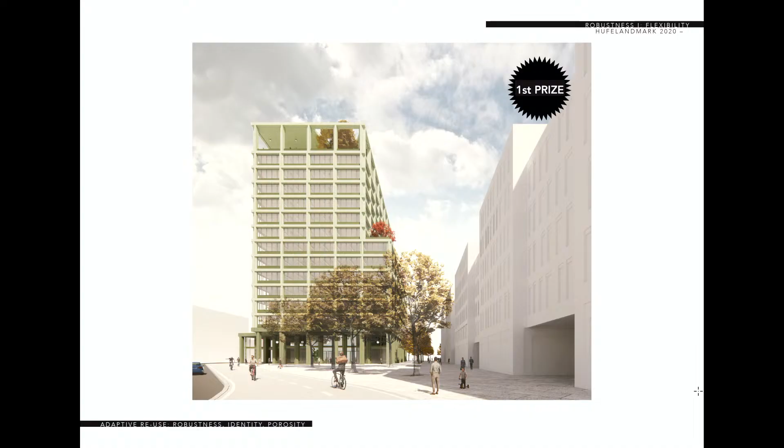One of our biggest projects in that context is a high-rise building in Munich with Morris & Company from London. We won first prize for this, and it's located in the north of Munich.

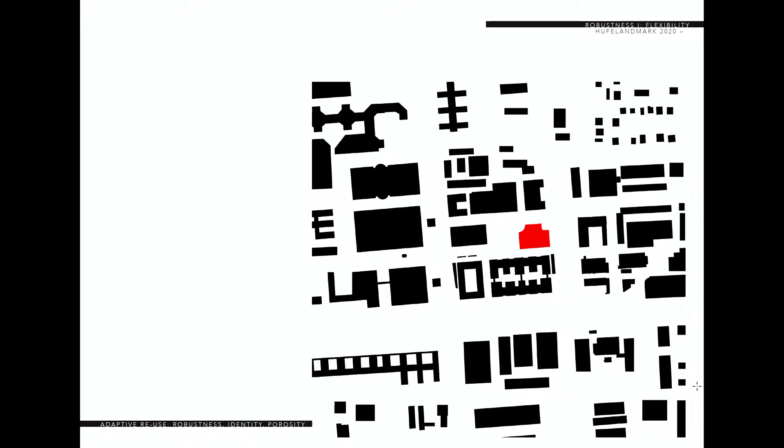Here you see a little bit of the BMW campus, the FIZ Future campus, which dates back a while, but was master planned by Henn Architects a while ago. This area - these four buildings - will be completely newly built in the next years, and they should mainly form office spaces, but also auxiliary uses for companies that deliver parts to BMW.

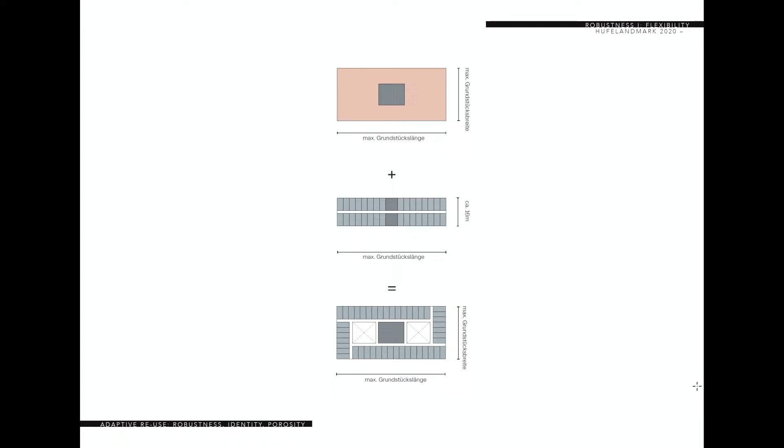Our task was to design a 60-meter high-rise that contains office spaces in the top parts and a hotel in the bottom. Those of you who have designed hotels or office spaces before know that those two typologies don't go together so well in that stacking order, because an office building usually has a core and you try to maximize the space depending on your site and distance rules. A hotel, on the other hand, usually has a corridor typology with standardized rooms - all needing a piece of facade, but not too deep, or it's a waste of space. So as a rule of thumb, you end up with a building that's ideally about 16 meters deep.

We solved this paradox by inserting two inner atriums, which you see below, next to the core. That gave us the possibility to make very regular hotel spaces around them, and also gave the building a spatial quality that a simple corridor typology wouldn't have. Here you see the resulting floor plan - above is a typical office floor, and as usual, we had to show that it can work as both open-space offices and cellular offices.

We also included loggias on each floor so that you have really high quality exterior spaces. Below you see the typical hotel floor with the interior atria, and here we have loggias that are 2 to 3 stories high, and they bring light into the inner atria inside the building.

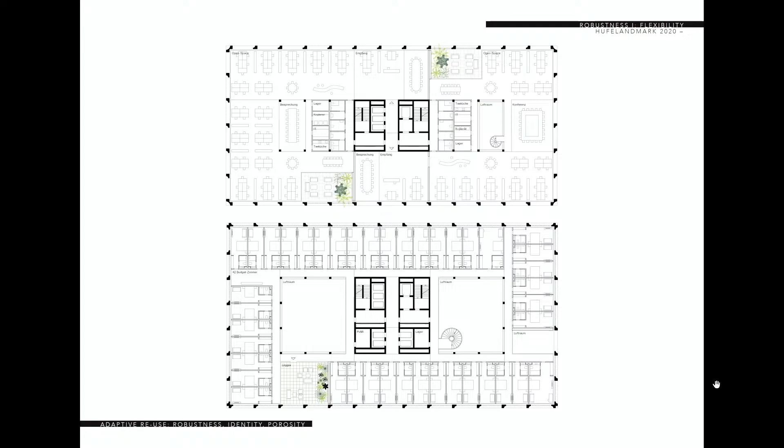What you also see here is a bit special. We have the core as the load-bearing structure, and then we have an exoskeleton around it. Away from this area, we don't have any columns, as you see. So spatially, the building is already as flexible as it can be in our mind.

Generally we try to make our buildings flexible, but here the main reason was that we designed it during 2020, the corona pandemic, and it was already clear that maybe hotels won't be so in demand in the future, maybe offices also not. We wanted the building to be designed in a way that we can close the atria floors later, for instance, and make it into office spaces or even residential uses.

How will that be possible? What we did, and that was a bit far-fetched at that moment, but now it would be possible also in terms of the German regulations, Zulassung and these things, is we used a structural system that's actually designed for making big industrial long-spanning spaces, big workshops.

That is, first of all, a very additive system, so you have a high degree of prefabrication, and when you're on site, you can just assemble everything. It's quite quick. The other good thing is that you have a post and beam structure: a precast beam, then a concrete precast post or column, and then steel beams that, depending on the loads, are flush with the underside of the ceilings.

And then you have pre-tension concrete slabs, which are hollow slabs, so that reduces the weight, obviously. That way you can have very high spans. In our case, it was 9.55 meters, which you cannot do with another system.

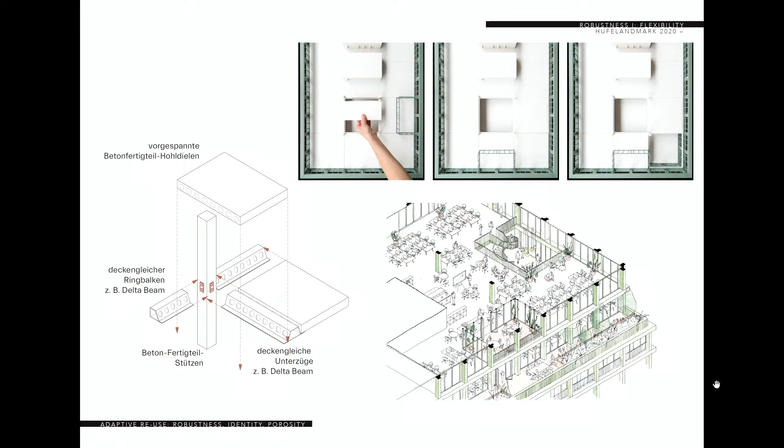I mainly already talked about what is shown here. Each floor can be divided into different compartments. The loggias can move - you see on the model shots that the loggia is on the right-hand side once, and then it's below. That's a bit of an effort, and you do it maybe every 20 years, but because of the exoskeleton, you could have the thermal facade changed around without changing or without having to do anything to the structure.

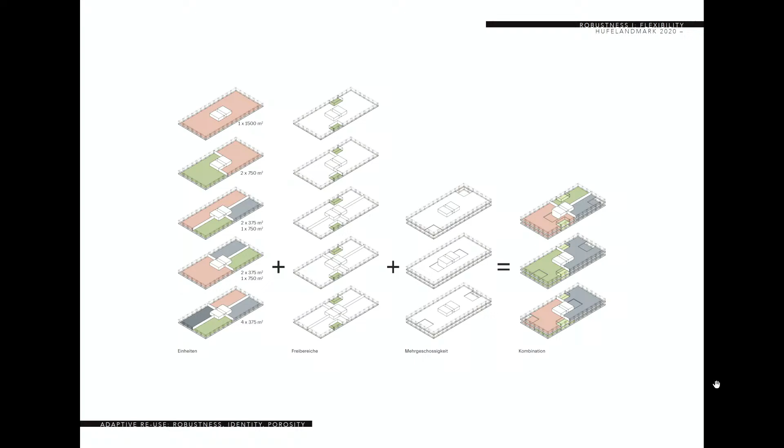That makes it more interesting, and then the soft spots, and overall you have a very lively building. Another thing that's not just about structure and flexibility is, of course, it's a really big building - 60 meters high, 60 meters deep - and we wanted to have some sort of human scale to it also, and also read these layers that the building has due to the distances you have to keep to the neighbors.

So the idea was that the precast exterior columns have these scoops, and the scoops have different radiuses on the different tiers of the building. That way, what you see on the right-hand side, you have different shadows that the sun creates, and that way the building gets this playfulness in the facade and also a bit more of a human scale to it.

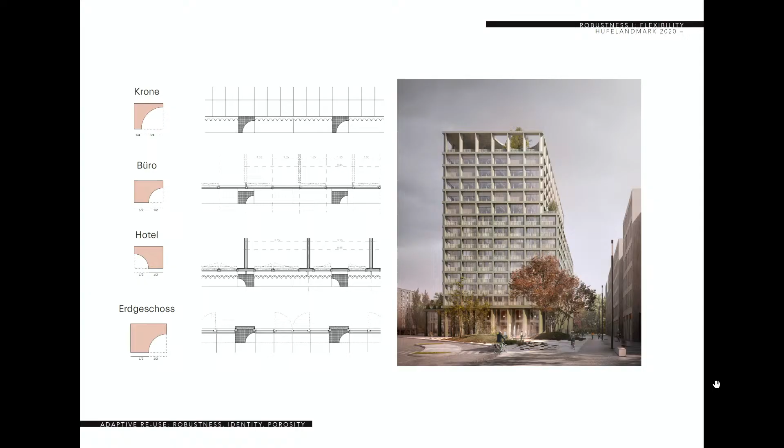The topic of flexibility, I was already interested in that during my studies, and the first project one of my partners and I did in that respect was in 2014.

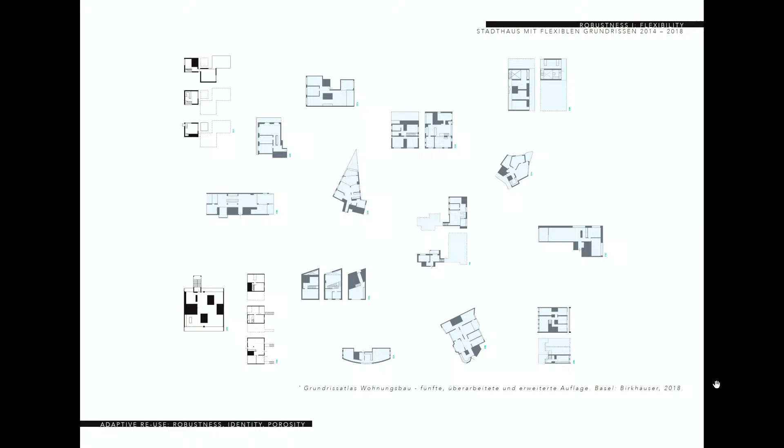Our take was that we have to do something different, that can account for people living together as a community, maybe four people in a shared flat, or older people living with younger families, or families who stay while their children move out. What do they do then?

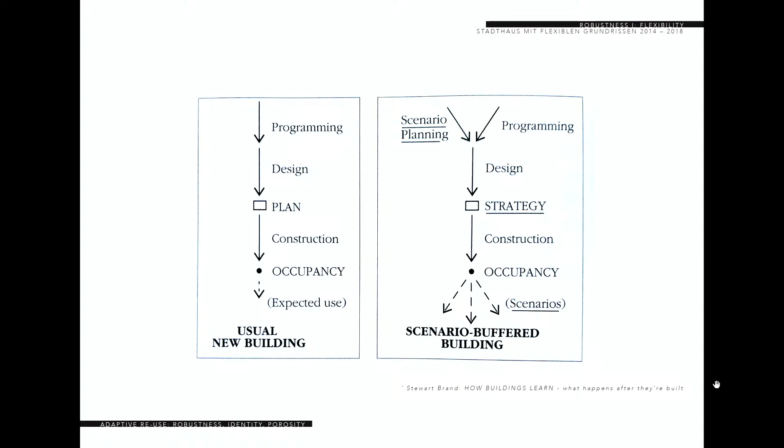I'd like to quote Stewart Brand, who says, if we're wrong in the beginning of the building, how can we look into what the building does later? He called that the scenario buffered building, which means you design scenarios that the building should be able to fulfill and specifically answer. So you don't try to design a building that can do everything, but think about realistic scenarios, and design a certain number of those into the floor plans.

In our case, we did something not many people did back then—now they do, which is a good thing. We said we want to make it a skeleton building, even though it's residential, and take ideas from office building typologies, for instance this inner zone which contains the wet spaces.

We thought about how the different apartments could be arranged so that apartments can grow and also shrink, which is a bit complicated when they're owned by different people. What I'm showing here is that within one big apartment you can have it as a kind of loft typology on the right-hand side—a completely open floor plan with just one box for the toilet—or you can have a maximum of 4 private rooms with a more public area like living, kitchen, and dining going through from north to south. On the left, you see some of the intermediate steps that could be realized with this plan.

How can you do that? Now it also becomes a little technical. I already talked about the structure—when you have the load-bearing structure, a skeleton, you can remove walls or even ceilings to create different spaces. But you also have to think about the MEP installations, because if they're the last thought in the design, they're usually in places where you don't need them when you want to change the use of a building.

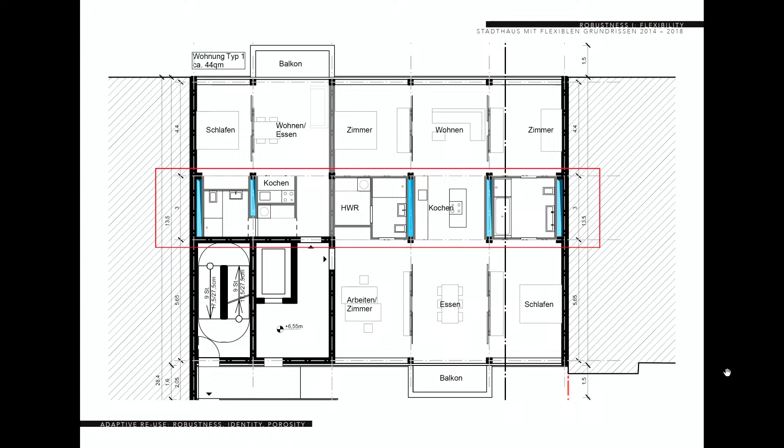In our case, we convinced the MEP engineers that we could make really slender shafts between the two columns, so that we'd only have columns left over when we clean the floor plate. This also gives the possibility to either have the kitchen here or on that side, or have nothing here—so you're very flexible about positioning these wet spaces that need the installations.

Another thing I find very important about the scenario planning: we designed these floor plans to have private spaces of maybe 12 to 15 square meters. So it's also about what sizes and arrangements you design into your scenarios.

You cannot put a wall later just in any place, because, as shown in the detail here, you have floor heating, sound insulation, and other requirements. In our case, we have this grid structure, and on it we designed a wooden beam that's always there, which interrupts the floor heating but also provides some soundproofing—and that's the place where you can realize a wall or not.

And what you see here in the rendering is that the structure also defines the space, so it's always showing in the reading of the space—the building explains itself, which I find important for communicating architecture with those who use it.

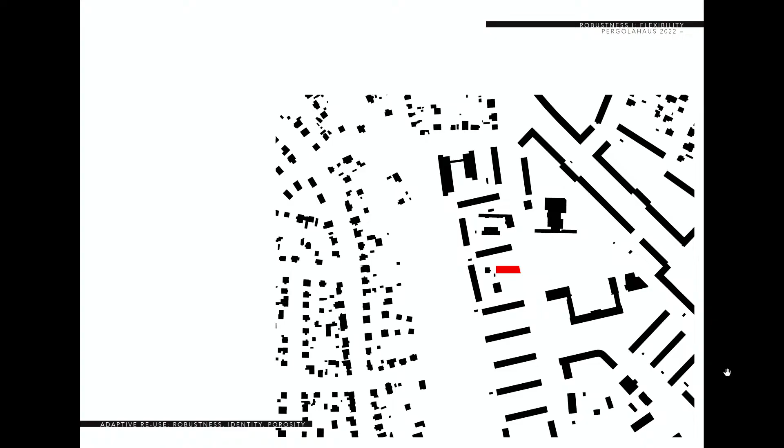We keep going with this topic. One of our recent projects is an addition in southwest Berlin, where it's not so dense, so it's also a densification of this area. The special quality here is a little river, but also these linear, green spaces between the buildings that people use for relaxation, sports, and circulation.

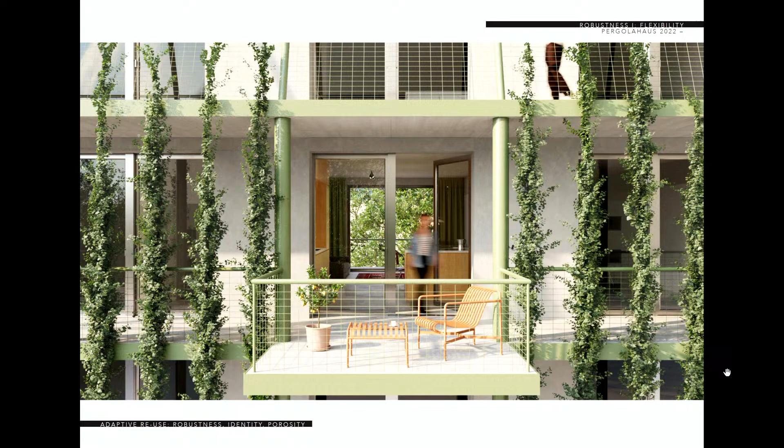We wanted to fit into that green atmosphere with big old trees, and designed an apartment building where the circulation into the apartments is a terrace typology. The way we added these little balconies is that the terraces are meant for circulation, and people meet there too, which enhances the communal feeling of the people living there. Then they also get private spaces to spend time.

This is now a climate buffer—normally you'd put this to the north, but we put it to the south, and the green plants make a climate buffer. In summer they're green, giving shadow and coolness, and in winter they're not green, so you have enough light inside the apartments.

Since this neighborhood is kind of monofunctional, we thought maybe just living is not enough—maybe a dentist or a little office should be possible there later. So we designed the whole building on a 1.35 meter grid, which you see in the middle.

Above you see the apartment mix the client asked us for, with bigger and smaller apartments. All apartments have this room that goes from one side to the other, giving a see-through effect where you see the greenery on one side and again on the other.

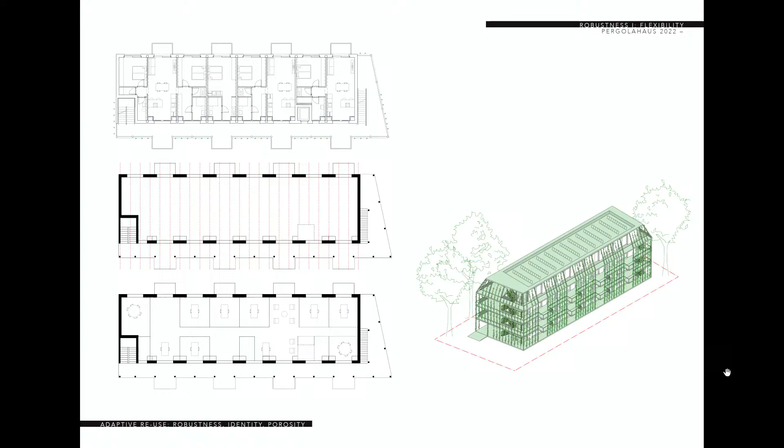The floor plans below are designed so you can realize an office space, for instance, here, and as you see on the lower right, you can have no columns inside the floor at all. That was possible because it's a relatively shallow building, not too deep, so we designed quite high beams that span from one facade to the other.

We have to think about the MEP always. In our case, we put it onto the facade, and it's over-installed—you have two shafts where sometimes you only need one, so later you can subdivide as you see fit and always have the water, electricity, and everything you need. These beams, when you have the open space, give a rhythm and understandability to the space for the people who use it.

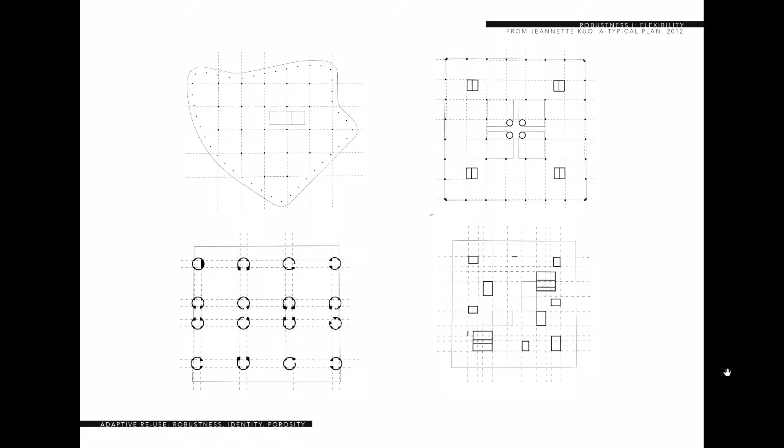I'm quickly jumping into something I like to show when teaching. Jeannette Kuo did a studio in 2012 about the atypical plan. She was looking at deep plans, maybe as a tool you can use when designing new buildings but also analyzing existing ones—making really reduced plans of existing buildings that show the load-bearing structure, the grid lines, and the installations.

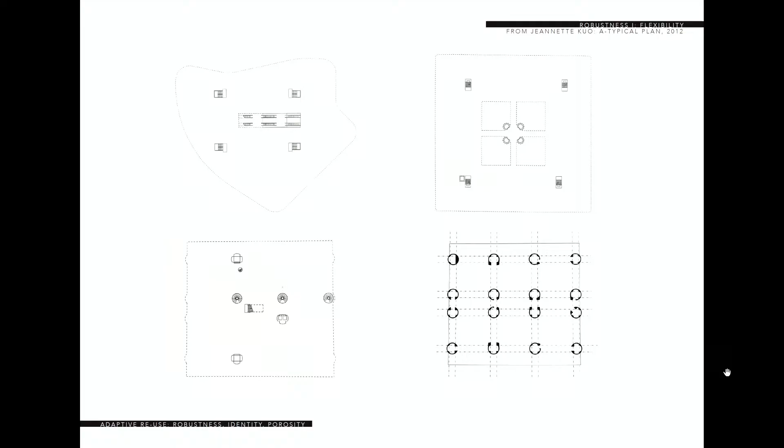In this case, you see the columns and the grid lines that result, and then where the installations are in the buildings. Also interesting and important for this topic is the vertical circulation—where your stairwell and your elevators are, especially in big buildings.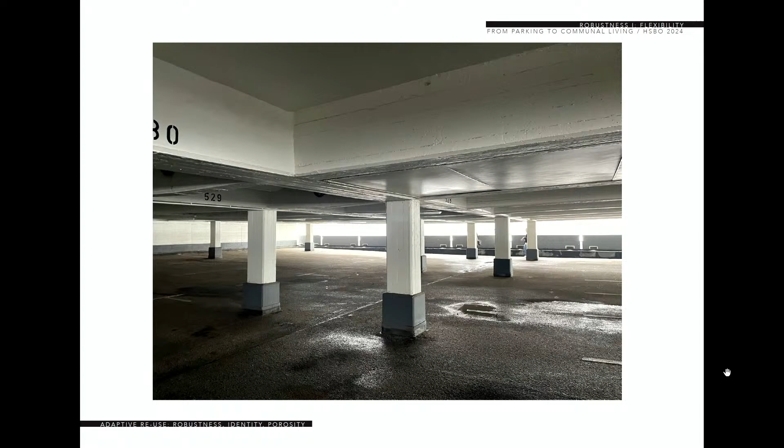That way of approaching buildings I also took into a design studio in Bochum two years ago. I asked my students to reuse an existing parking house, which is in Hanover, into a communal living typology.

I always think we should look at two things at the same time. One is the spatial quality of what's there. So the students build models and arrange little situations to look at—can we deal with low ceiling height, for instance, or what happens when we make little portions of that higher?

We also looked at the structure again, and the students built big 1:100, maybe 1:200 models of just the post and beam structure. The requirement was that the structure has to stay intact, so you need the cores, posts and beams, but you can take out the ceiling slabs.

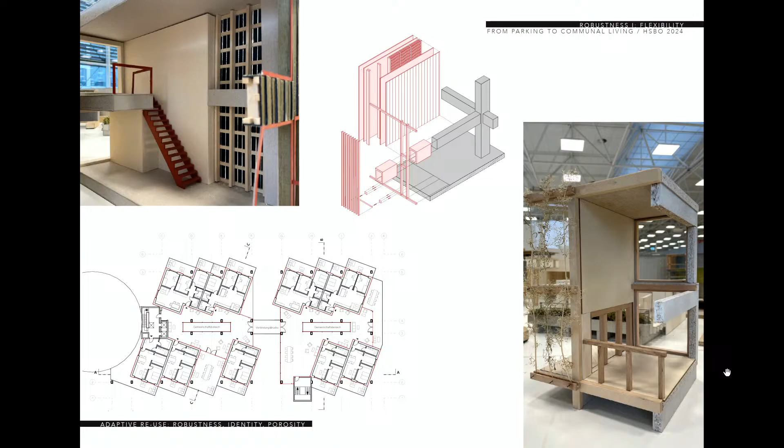And the result was really interesting. So you have this three-dimensional matrix of posts and beams, and students sometimes decided to go against the grid and do something diagonal, creating interesting spaces that are like balconies already half in. They all worked with double height spaces, since the existing building only had 2.60 meters floor-to-floor height, which for residential use, with floor build-up and so forth, isn't enough. So you sometimes have compressed spaces and sometimes open spaces, giving an overall interesting spatial quality.

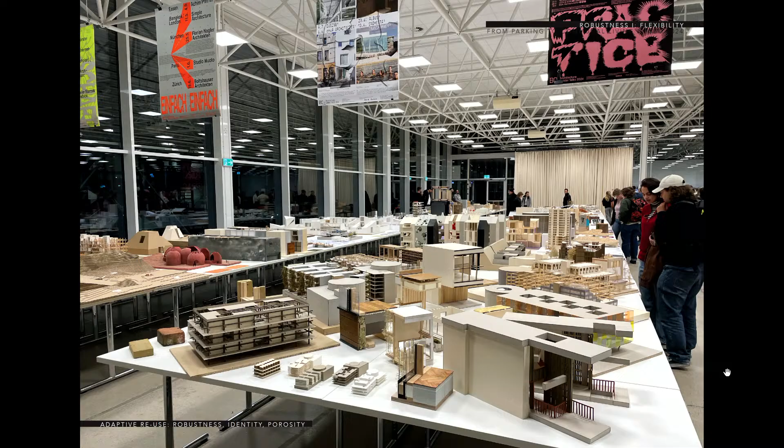I like this building, this picture, very much because it's also a nice space that it's set in. But what I actually want to point out—in the front you see all the models from this design studio, and here you see the urban scale models. Within that matrix that was the same for everybody, students created very different spatial answers about what the thermal or inner spaces of the new use would be.

Now I'm briefly talking about another approach, variability, defined as designing spatial structures whose dimensions allow them to be used differently. Of course that has typological boundaries. So within an apartment, you can use a certain space maybe for living and sleeping and working, or as a kitchen. It's difficult to fit a theater into an apartment, of course.

With that in mind, we designed an inclusive community in Petersaurach, a little town near Nuremberg in the south of Germany. What's important from the urban design is that the actual town is here with a little main street and some shops, and everything above the river is the typical suburban sprawl with single-family homes. Because they're very close to Nuremberg, a growing city, they have more and more of these suburban areas where people live and then work in Nuremberg.

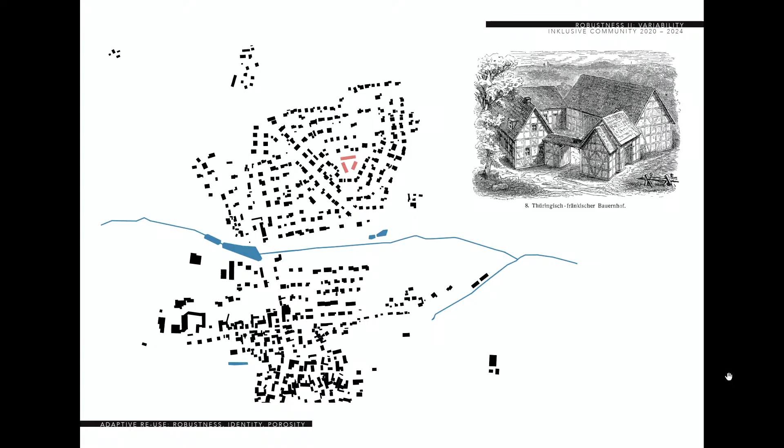Our clients were lucky to get this plot in the middle of one of these new areas, so we decided typologically to create a bit of a new middle for this sprawl-type area. We looked into some traditional typologies, like this Franconian rural typology.

The important thing—maybe I should say a bit about this community. It was an existing group of people who had decided they wanted to live together, ranging in age from 0 to 87, and they had some members who were severely disabled.

One group member had children, so she was also taking care of two people who were in wheelchairs. Then there were other people with disabilities, some older, which is why it's called an inclusive community—their aim was that they all care for each other, looking out for one another, maybe taking turns helping with the little children, the older people, or the people with disabilities.

For this reason, the heart of the whole design is this communal courtyard, which isn't closed off to the exterior but is the main place where they come together. To create this middle of the sprawl area, we also designed a Dorfplatz—usually the center of a little village. In Germany there's a tradition of planting a certain type of tree where people get together and talk, and we wanted to provide that too.

We also included a bit of public use, an ergotherapy praxis—does anybody know what that is in English? It's a type of therapy where you build something or play, being creative but also working with your hands, which is the therapy one of the community members provides to clients. Then we have two residential buildings on the lower part and a big communal building containing a community space, plus practical spaces for storage, cars, gardening tools, and things like that.

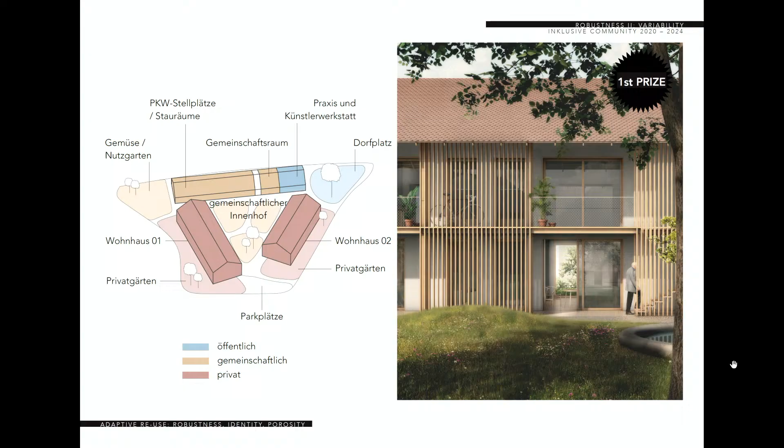Really important is the sequence of public, communal, but also private, because you cannot be in the community all the time, then the community probably has some fights soon. So we defined the sequence that you enter the whole thing from the public areas on these three corners, then you enter into the communal court, and from there into the private living buildings. Additionally, you have private gardens to the outside, so you can be outside without having to talk to anybody if you don't want to.

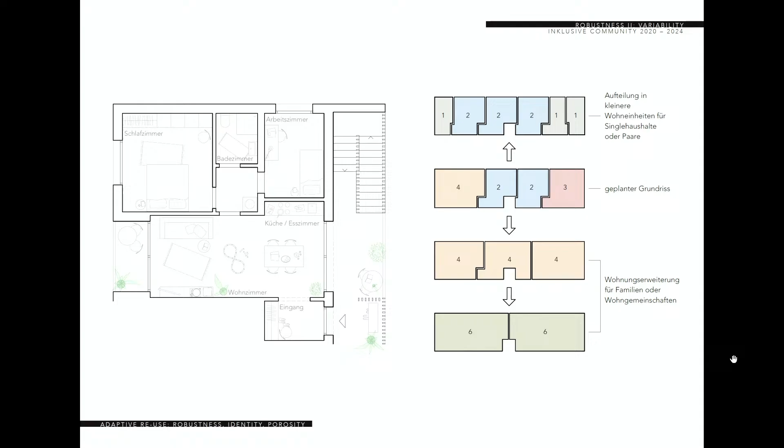And you can change the size of the units because each unit has this entrance area, and here you can make a link to the next entrance area. That way you can make a chain of spaces that belong together, or you can separate them later.

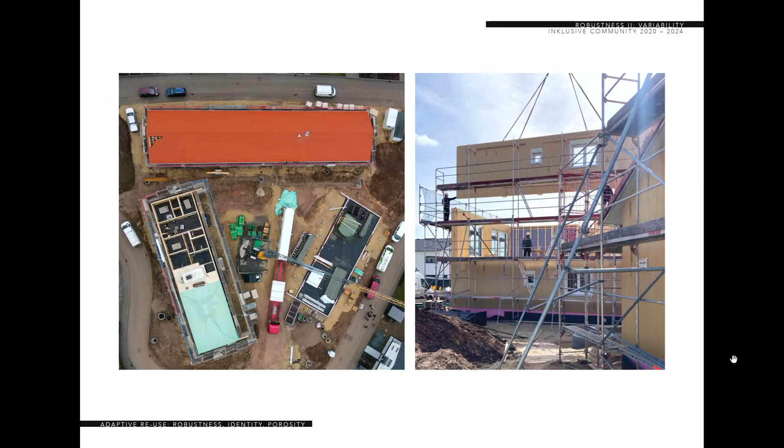Why did we do that here instead of the other approach that we did in other projects? That's because it's a building that's made of these wooden framework components that are prefabricated, so it's this kind of cellular structure, and these are not very flexible. You cannot cut just a hole in there in any place later, so that means that the walls that are built now will probably stay the walls for the whole living time of this project.

In the meantime, the community has moved in. The garden is not completely done, but what we're really happy about is that these terraces are really working really well. All the residents say that in the morning when they go to work and somebody's sitting there, they have a quick chat and maybe they meet later in the afternoon. So it really kind of keeps the community together.

It says first prize because first of all, it was a competition and we wanted to then do the project. Secondly, this community won the Bavarian Integration Prize recently for their building and living together. And very German, something we didn't think about, is that they put these doormats in front of their nice sliding doors.

I talked a lot now about structure and flexibility, but I will talk also about spatial qualities in a bit. The quote I have here is from Christopher Alexander, who was interviewed by Rem Koolhaas and Hans-Ulrich Obrist a while ago. He says: look, my real aim is I want the Earth to be beautiful again, and to be beautiful, of course, it has to have in it nature and spirit and all of the different people in all the different places. The beauty I'm talking about has to do with indefinite differences.

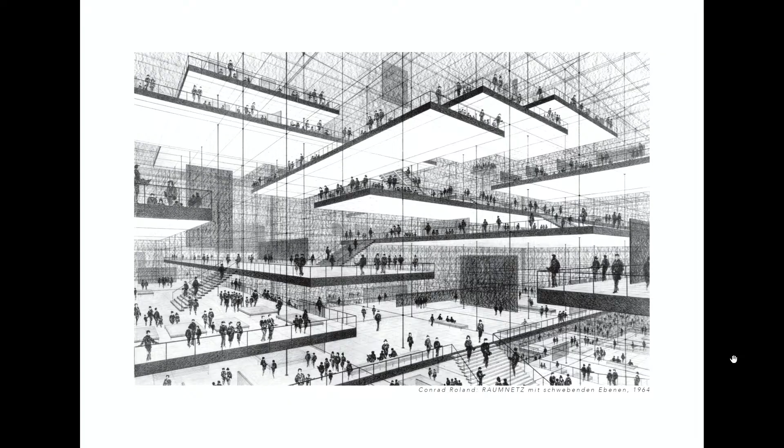The nature of what is done is different in different situations and places, all the cultures are different, all the places are different. But still, the power of it comes from the elegance of the generative code that makes it possible. I don't think that's a contradiction, and that's something I agree with very much. So a very general code, and the life that fills it, makes it special.

Now I will show some projects from our office, which are smaller projects, which are reuse projects.

What I find interesting or important about these projects is that you really look for each building or each space and find the specific identity of the space, or the spatial quality, you could say—the specific spatial quality that defines the identity of that very space.

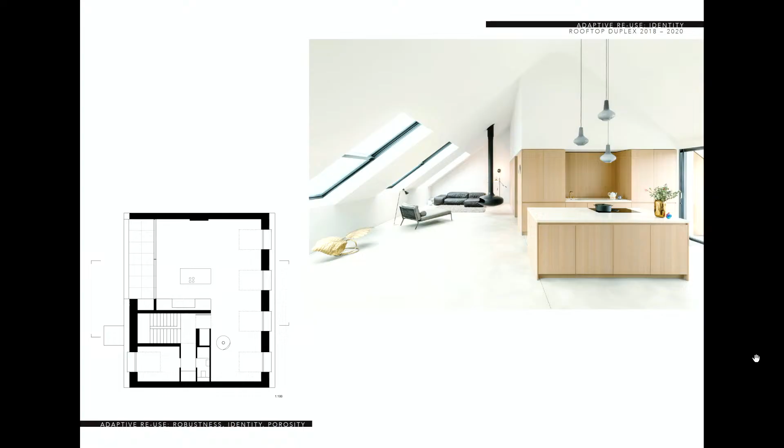One of our first projects was a duplex in an unused rooftop apartment in the center of Berlin. The specific quality here was that you have this roof typology, a space that's very high, and we wanted to show that by making the floor plan compress the necessary uses into a little box in the corner, so we keep this big open space and the big height visible. With the beamer you can't see it so much, but there's also a rounding under the top of the ceiling, which makes a gesture that deals with the specifics of a rooftop apartment.

What was also very special about this project is that it's a multi-story apartment building from around 1908. The staircase that's public below became private on the top part of the building for this apartment we designed. Again, you have the special quality of the last flight of the staircase and then this really high space.

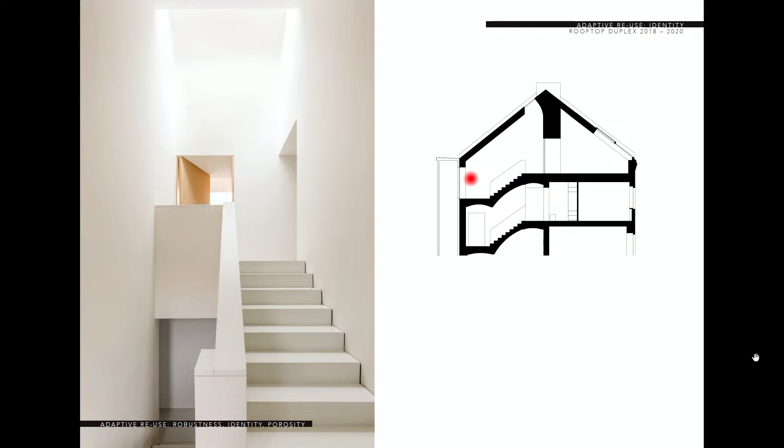The residents of this apartment, our clients, would always arrive with the new elevator on this level. So we designed this top light here to give it a kind of church-like character, which is very nice. Every time they arrive there, they have this really special place that shows: I'm living on the very top of this building.

Then there's our own office, very small, also in the center of Berlin. It's a building from the late 1950s, early 60s, which we scouted ourselves. It was empty, and 10 years before that it was used as a drugstore. There was one special quality we loved about it, which is the floor.

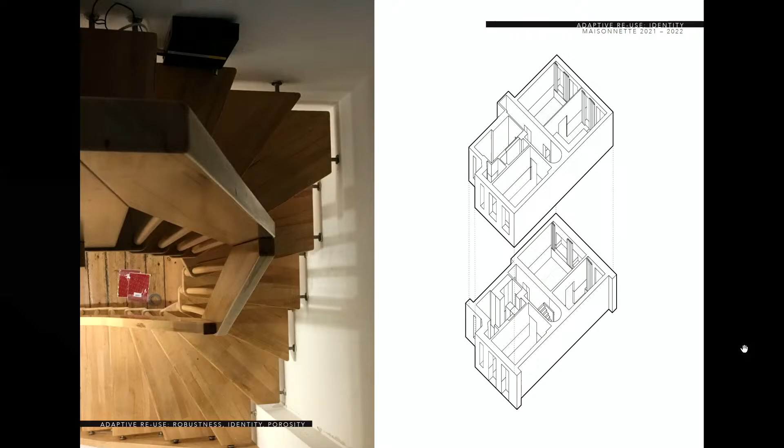As you can see, we do a lot of rooftops and conversions in residential typologies. I'll briefly show another one—a duplex again in the center of Berlin. What we found was this really ugly staircase in the middle.

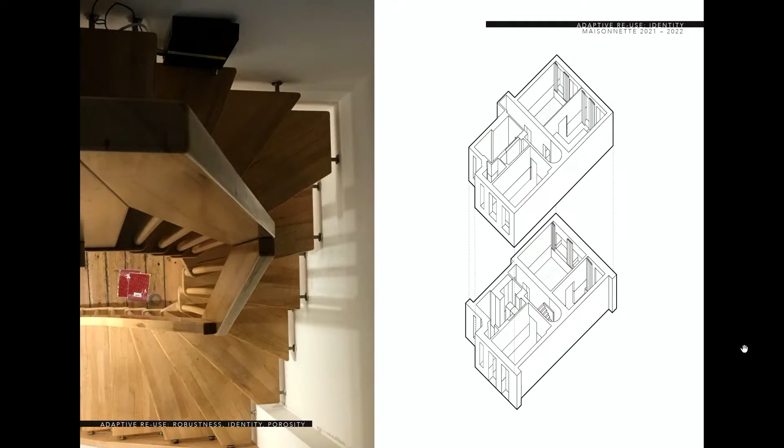In this area of Berlin, you were not allowed to change any walls. There's a certain law that says the floor plan has to stay the same, and the uses also have to stay in the same location. This ugly staircase was installed in a space that's only 1.25 meters wide or so. You can see it a little in the axonometric here.

Our idea was that if this is such a difficult space, we should actually make it the focus of the whole design. We made many models of different variations and ended up with this slit at the end of a hallway where you go up into the second floor.

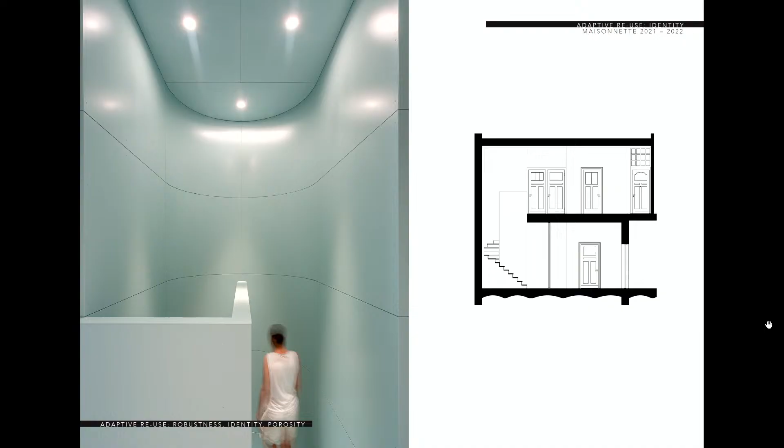It's a staircase now, made out of steel. It's essentially one piece—well, one piece wasn't actually possible, but it's almost one piece, and it looks like one piece. We had almost no space to have enough width for the staircase, so we created this really narrow, snail-like space that connects the two floors. Everything else is minimalistic and gray, and the staircase got a bright color that says: I'm special because I'm narrow.

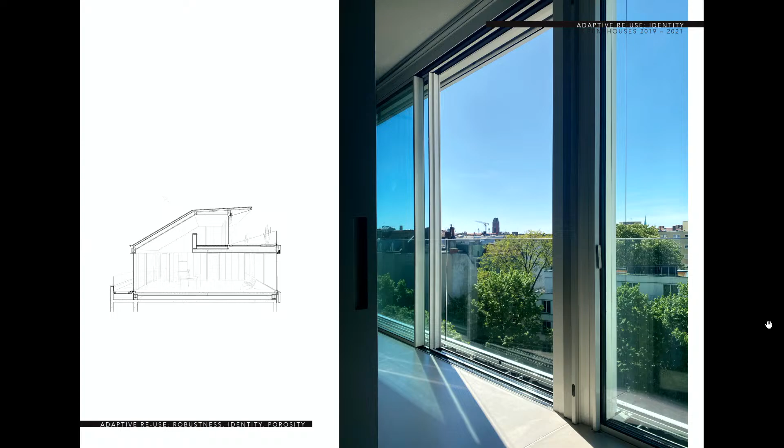Yeah, and yet in other projects, this one is not completely finished yet. It can be the views in this area of Berlin that has these different, really dense layers of different types of buildings that we also then connect with the little escapes you can have in the Berlin courtyards with some greenery. And that leads me to the next topic, which is porosity.

I'm not completely sure how I'm doing on time. Can I just keep going? Oh yeah, that's good, sounds good.

Porosity. I saw that some of you had mat buildings in your collages, and the idea of porosity, I think everyone knows, is this question of what's the figure and what's the ground. If I have a very dense setting or any space, the holes in it can be the interesting part of the spatial experience.

Especially in campuses and hospitals, which is a campus typology, the mat building was very popular for a while, and there are a lot of interesting examples. I'm showing the Freie Universität in Berlin on the top left, the Children's Home in Amsterdam below, and this is a technology park in Moscow by Herzog de Meuron from 2012 or so.

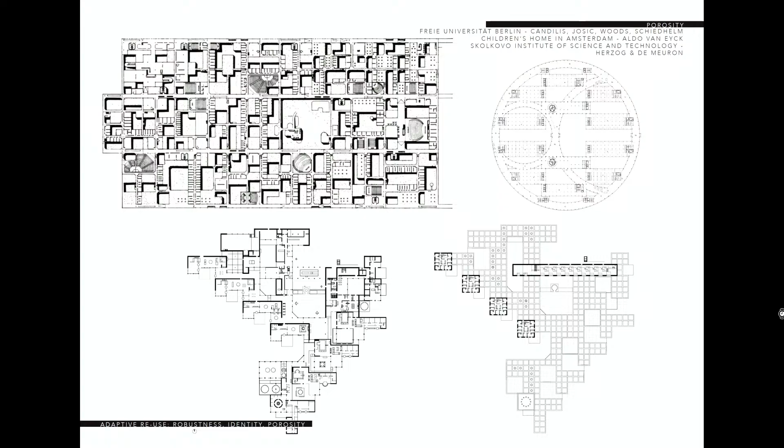What I found interesting is that in the explanation for the Freie Universität in Berlin, the architect said that in a skyscraper, the floor plates separate all the different disciplines or what's happening in the building. They wanted spatial overlaps so people communicate with each other and know what everybody's doing. Their answer was to make a ground scraper with a split level typology to ensure everybody interacts. I find that interesting because maybe the ground scraper isn't the only right answer for that.

As you mentioned, I worked with Steven Holl a long time ago. He said in his big projects that he doesn't want these typologies, the typical high-rise with a podium and then a tower, but instead a porous block that ensures views, accessibility, and interaction between the users and the public, for instance.

So in your case, maybe the question is how do you get the mat building that you have as a base into the existing high-rise that you find here? And I will again show some examples of how we dealt with this.

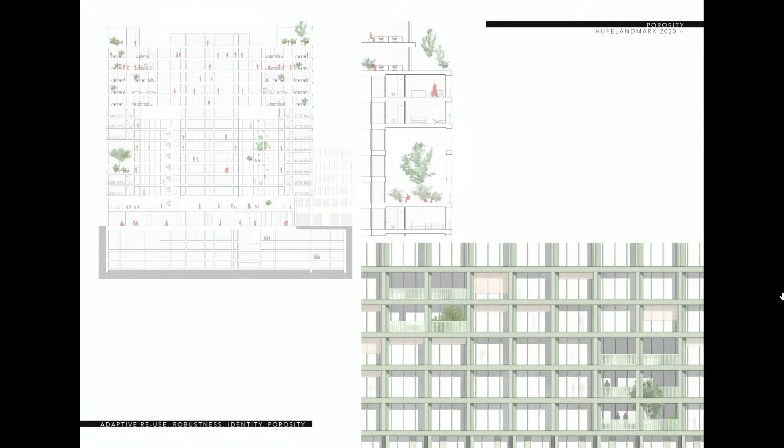I already mentioned the high-rise in Munich that has the inner atria, but also these cut-out three-story loggias to have these porous elements in this very dense spatial structure.

I also find it interesting to look at the existing, so I'm showing here a project which I can't disclose completely, but it's actually a general research topic of ours, the adaptive reuse of 1990s shopping malls, which we conducted together with an office from Münster, Maas & Partner. As you know, the shopping malls from the 1990s are old by now, so a lot of them have to be rethought, and this typology in certain urban areas doesn't work anymore.

People are not going there for shopping anymore, so the question is, what do you do with them? They're very deep typologies, a lot of concrete usually. In this specific case, it was not only about how to use the base or the shopping mall itself, but how to extend it towards the top levels.

It's again a skeleton building, so our suggestion was to install a wooden addition of 5 to 6 stories on top, which follows the grid below, creating a very flexible space that can have housing, offices, or both. We designed this kind of cube, 32 meters deep in section but divided into two, though it's actually one structure, so you don't have to keep the distances between the two.

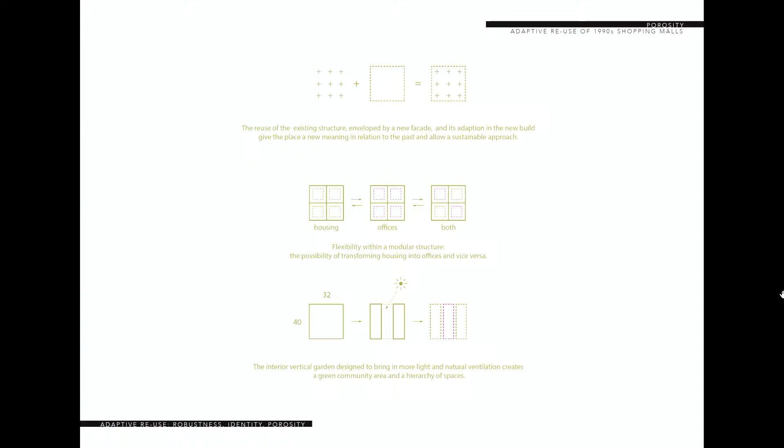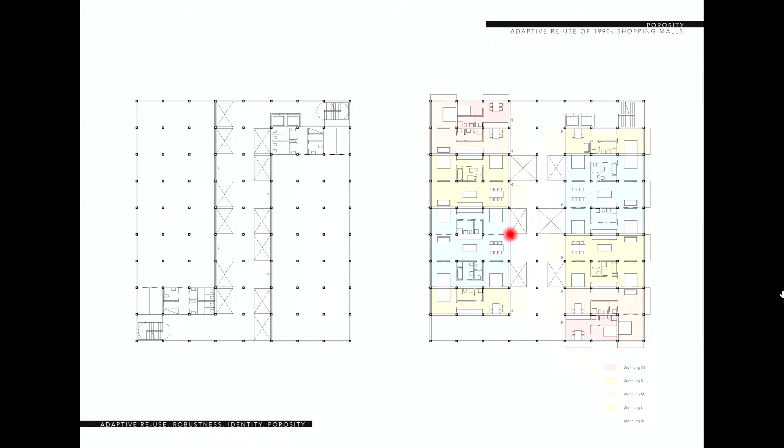That structure made it possible to give this porous feeling and a very interesting spatial arrangement. You see the grid structure and some residential uses, and in the middle you have this kind of canyon which handles circulation and has cutouts that help provide views in all directions. It helps people meet, maybe between the office workers and residents, and you could even have a party in the middle. The porosity also allows for gardening in the spaces, creating a very livable and multifunctional space in addition to the interior spaces.

At the same time, porousness can also do a very important job in terms of the climate regulation of a building. I'm now showing an example from Tel Aviv in Israel, but I think it's also getting hotter and hotter in the middle of Europe, for instance, and it's a topic we have to deal with now.

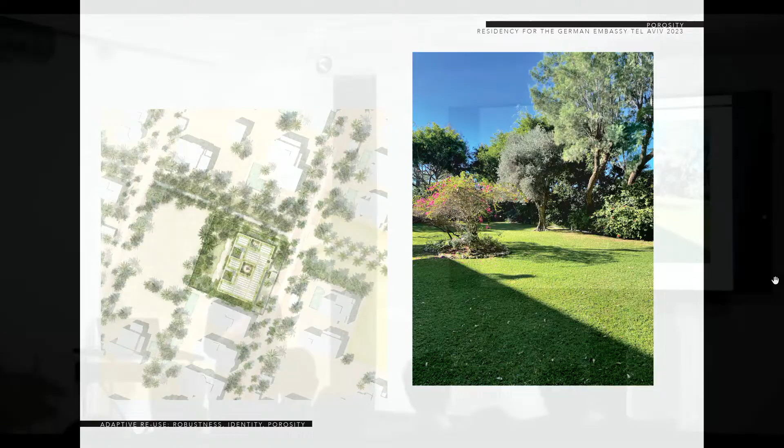This was a competition for the new residency for the German ambassador in Tel Aviv. One of the main features you see on the right is the garden of the building. The brief said that the ambassador's residence is not only a residence, but also hosts parties and guests from other countries, so it's also a very formal function, and the main character in that function is the garden.

So what we did is design a building with all these patios cut out. One reason, which you see here in the section, is that we wanted the garden to come inside the building, so there's no distinction anymore between the garden and the building, and to create a continuous experience when you arrive and are led directly into the garden.

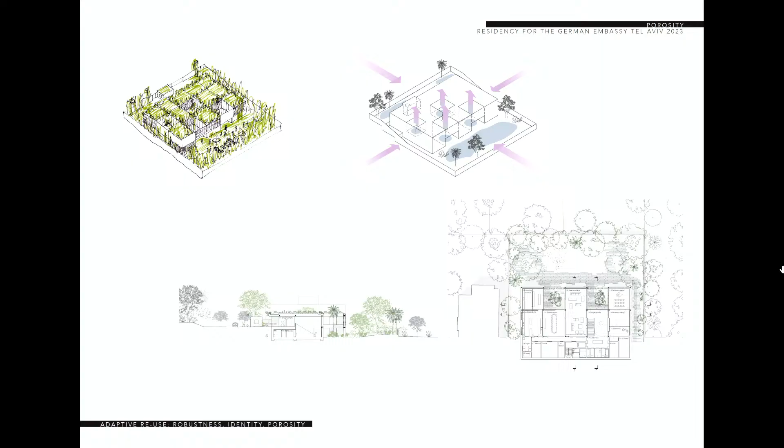The other important aspect is that we designed the building in a very low-tech manner, so there was no air conditioning except for one space, the 200 people meeting space. All the other climate regulation is through so-called adiabatic cooling: all the patios contain water features, and the air goes across them, reducing the temperature, plus plants in the patios.

You may know this competition. It was won by Gustav Düsing, and he suggested keeping the existing building, which I'm really happy about. The brief was very clear that it had to be torn down, and we discussed it for a long time. In the end we said, okay, maybe if they want that, we have to do it. But we wanted to ensure the new building wouldn't get torn down after only 50 years again, so again we designed a very flexible structure. In this case it's steel, not wood, because of the termites in the area.

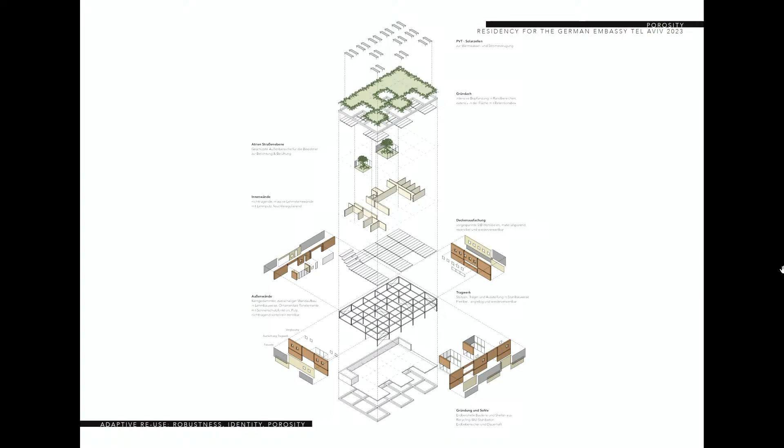The steel structure has these infills in clay. Clay is a material you can find in the area, and there's also a tradition to build with it. When you make these clay bricks, you can fill in a wall here and take it out later - it's very flexible. Plus, we also designed with the local regulations and how they count areas, in a way that you can actually add another story later when you need more space in the building.

Apart from the clay, we wanted a flexible building. It's kind of a foreign building in a way in that area, but we also wanted to find the identity of the local place we were in. There's a tradition of building with limestone, Jerusalem stone, in Jaffa, which was the original settlement of Tel Aviv, and so the facade kind of represents that stone.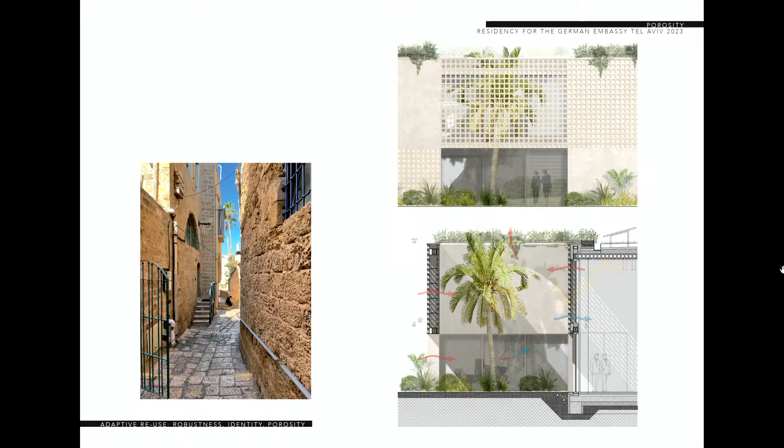In the floorings we used the actual stone, and the facade was a burnt clay tile with the same color. I kind of like this image because it shows we tried to fit in the local climate and the local building tradition, but it also has this touch of the Kanzlerbungalow - long ago the Chancellor of Germany used to live in these very modernist but also typical German bungalow-style buildings. So we tried to merge these topics and ideas.

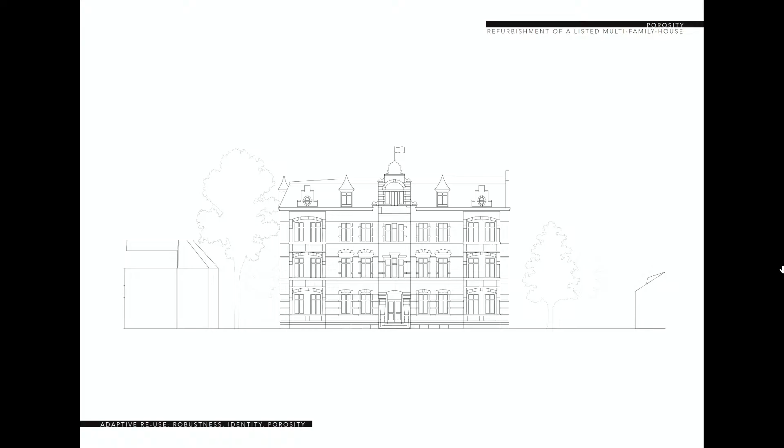Going back to the idea of porosity, designing not only interior spaces but also working with exterior spaces as design tools can also be used in situations where you don't think about it directly. This is a project of ours, a listed building in the south of Berlin. Because it's listed, you can't change the exterior at all. It was supposed to be renovated, and the unused roof turned into apartments. You see some very small windows in the existing facade, which aren't enough to light an apartment, but the office of the Denkmalschutz was very strict, so no changes were allowed.

And so we came up with a scheme and plan that we cut out these little patios inside the roof. So now you come up the staircase, you enter an exterior space, which at first in Germany people say, what if it rains? You cannot do this. So we added a little roof here in case it rains.

And then from there you go into the actual apartment, and so that way also, of course, you have enough light, you have a big glass facade, and you have this kind of meditative inner courtyard, which can be used, or it can also be like a miniature garden. And you see how it works in section here. I don't have realized photos, but it was realized and it's rented out now. So the client was bold enough to go with that.

And what I just want to talk about on the side is that it was also an interesting project because you have to negotiate with the Denkmalschutzbehörde, the local governing body that oversees all the listed buildings. And at first they didn't want the roof to be changed at all, or they said you can do it, but you cannot add an elevator. And nowadays you can't rent out an apartment or sell an apartment on the 4th floor that doesn't have an elevator. But we understood their general position, and so in the end we reached an agreement by proposing—maybe I'll go one plan back.

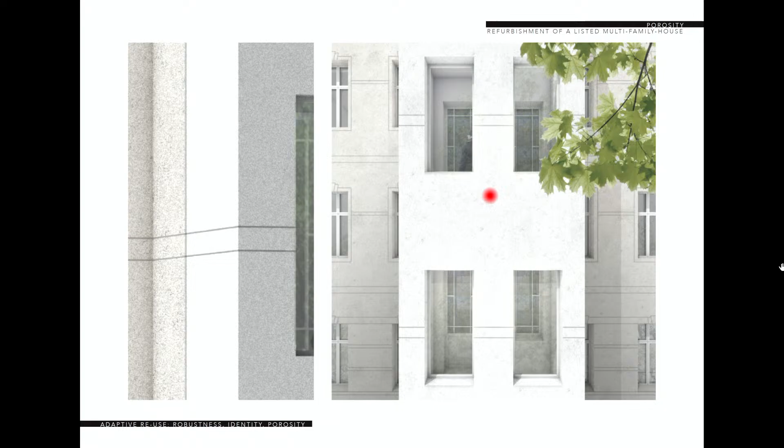And then it has open windows here, so you see the existing windows of the staircase, which is these colorful Gründerzeit-style windows, and then you have the elevator shaft here, which also has these windows, and that way it kind of looks like it's always been there, and in the certain materiality though it shows that it's an addition. And that way we got the okay to do that. And yeah, here's an image of the interior courtyard.

And lastly, I would like to talk about a topic that I didn't announce in the title, but that I think is very relevant at the moment. And I understood also from your design brief that you're not only designing the buildings, but also the spaces in between and the exterior. And I think this project is very relevant to that topic.

It's the competition entry for the new central entrance building for the Deutsches Technikmuseum. I don't know if you've been in Berlin. It's one of the really important museums in Berlin, and it has one main building here from the 1990s, where one of these iconic planes is hung from the top of the building. So when you take the subway that runs here across the Landwehrkanal, you always see this aeroplane hanging there.

And the thing is that they don't only have the main building here, but they also have exhibition spaces here, and then it's really confusing because this is the main entrance, you buy a ticket there, and then you somehow have to run around here, and it's just a parking lot to go here. Understandably, so they asked for a new building here, a central entry building where you buy the tickets, but also they included in the brief 3,000 square meters of new program for that new building. And the existing museum has 30,000 square meters of usable area.

And we thought this is such a sealed space at the moment with just stones, and then maybe we unseal some, but we add another building—somehow that's not the right answer for the current problems that we have with climate change and these things. And it's the building, it's the Museum of Technology, so it shows the history of how people invented new things to solve problems of humankind, like the steam engine and these things. And we thought the current problem is the climate crisis, and maybe that should be showcased in the design answer for this.

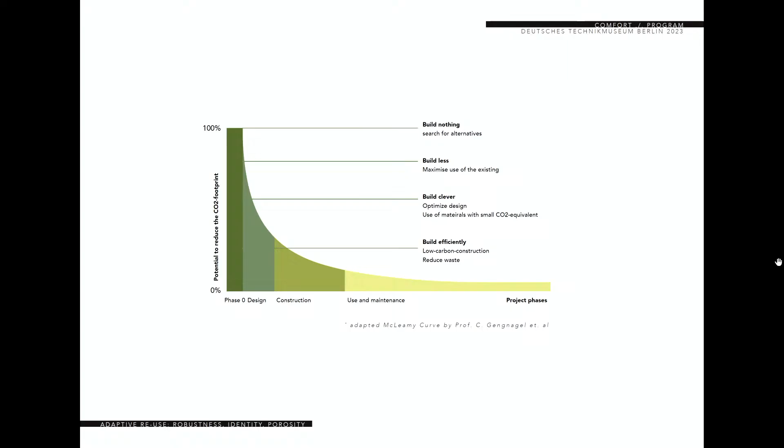And the same applies to the carbon footprint of a building. In the beginning, you can build something or not build something, so that's a big influence. The further you go in the design phases, and especially during the use of a building, you can't really do much anymore to influence how much carbon it emits. With that in mind, we said build almost nothing, and we proposed to plant a forest instead of the main new building. I will now lead through all the different thoughts we had about this and why we did it that way.

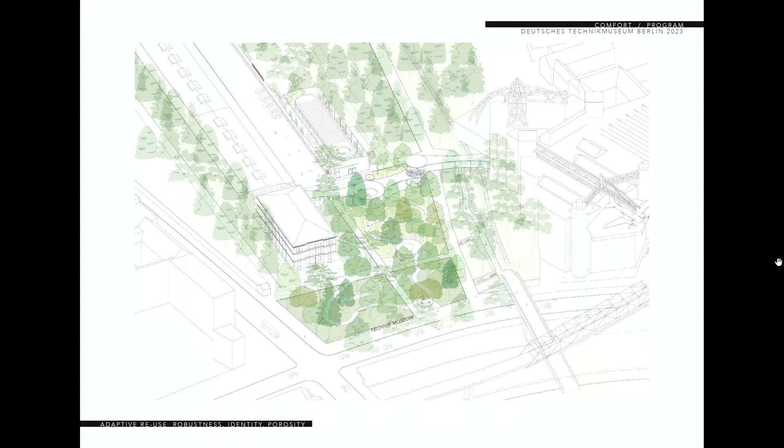Maybe I should go back one step. I said that 3,000 square meters were asked for the new building. 30,000 are already there, so our math was that 10% you can somehow find in the existing buildings. Must be possible. So we said, let's plant a forest as the new technology that helps prevent climate change.

In the beginning we really thought about just planting these umbrellas in between, which kind of guide you. There's also a height difference, so they should have been this ring of umbrellas that guide you into the different buildings. It wasn't possible because there's a subway underneath, and you can't do the pile foundations you'd need for a structure that's swaying a little bit, maybe.

So what we did in the end is design only a little series of pavilions in the forest. Here is the address-making pavilion, which has just a little bit of information and says, at the main street, which is also at the waterway, look, I'm here. But the forest also says I'm here, very much so, I would say.

Then there's a classroom, like a forest classroom, which isn't tempered, but it's open, and a lot of the clients of the museum are school kids. So the schools go there to teach the kids about technological history, and they can sit there and have lessons about how forests work.

And then there's this little building here, which contains an arrival space and ticket kiosk, and then just a roof space into this part of the building. And then there's a little stair tower and a bridge across in that main building because of the height difference that you had to maintain.

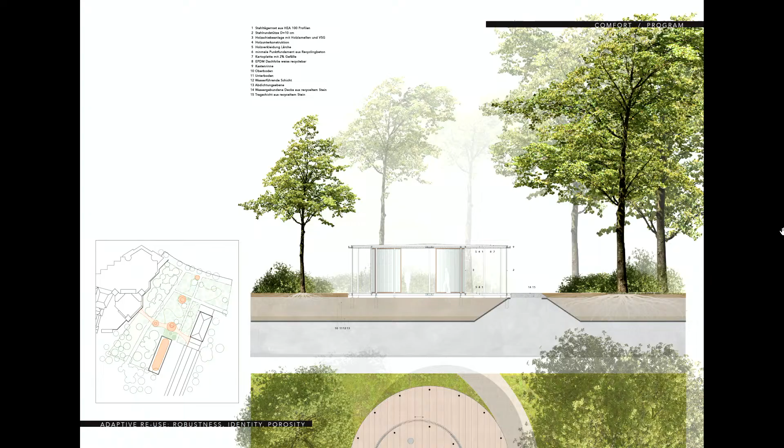And the most important part, like I said before, was finding the spaces. They wanted to have picnic zones, more toilets, a museum shop, and all kinds of stuff that went with this new entrance. All the gray areas that you see in that plan are the areas where we relocated the things that were asked for in the brief.

You see, for instance, in that existing building is the museum shop. I said we reactivate the ruin for the seminar space, and we have the picnic zones and the locker rooms, for instance, on the inside of the existing building.

The actual topic that I'm now interested in very much, and that kind of came with this competition, is two questions. One is the question of comfort. We've kind of come into a situation where every room, in any situation, has to have 22 or 24 degrees, depending on the norm. So in our apartments, the bedroom and the living room and the kitchen, everything is the same temperature. The question is, is that necessary, and is it really comfortable, or can it also be comfortable to wear a sweater and have colder temperatures in certain areas, depending also on what activity you do there?

For instance, in our design here, we asked ourselves, in Berlin winter it's maybe 5 degrees, you go into an interior space to buy your ticket, and then you're waiting in a line with 100 people. You have your jacket on, you're sweating, because you don't have the ticket yet, so you cannot go in and put the jacket into lockers. So we said, if the forest is the foyer for us, the forest makes shadow, it protects a little bit from the rain, and it also makes a little bit more of a temperate space in cold climate.

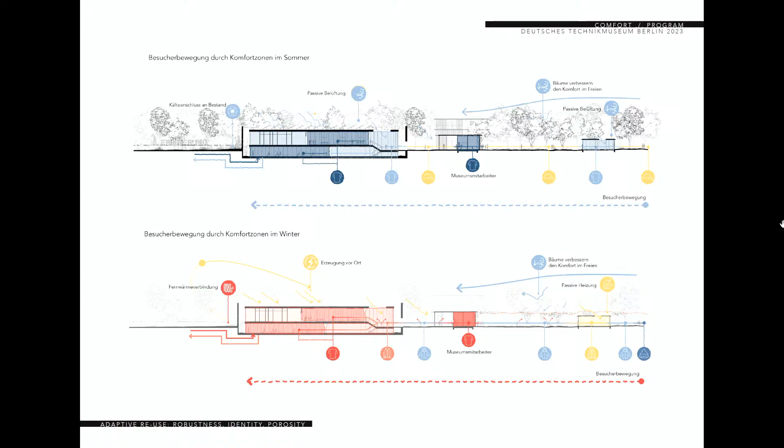For instance, some spaces you can compromise, but the ticket kiosk here, where the people selling the tickets are sitting 8 hours a day, of course that's heated, because otherwise it wouldn't be fair to them.

So that's one question, the question of comfort, and with that comes the question: does every program that you need require an interior space? Or which programmatic elements can you just have outdoors, in covered spaces, or in semi-outdoor spaces?

Thinking about the campus you're working on, and also about meeting people, exchanging ideas, maybe just making some sketches when you develop something new, or eating—at least in the summer—a lot of these things can happen outdoors, and that reduces the need for actually built matter or architecture.

This topic that I just mentioned is something we continue to research and deal with architecturally. At the same time, the question is: what's the role of architects in the future, with climate change, social change, and a lot of really big, complex problems we have to solve?

Our take is that it probably makes sense—and that's a dialogue between clients, governments, and architects—to include architects very early on, even before the design brief is made, because a lot of the questions or approaches would change if you had a spatial idea and approach to it.

What you may not know is that planting forests is much faster than changing how much energy we use. For instance, insulating all the buildings and reducing how much energy we need for heating takes years. But when you plant trees, it automatically directly absorbs CO2. So enhancing forests, but also nature in general, is actually a much quicker answer to climate change.

That's why we said that's the technology of the future that we showcase here. Of course, that means all the school kids who come there, but also the adults, can learn about different types of forests, different types of trees, the conditions and requirements they have, and also how the forest in Germany has to change maybe because climate is changing.

Like I already said, the landscape architect designed these different fields. He designed different drainage patterns to ensure the different types of forests. He also designed the spaces in a way—he made this plan of where small trees are and big trees are, and they make different spaces underneath them.

And then there's this didactic path through the forest that has all these different stations where the different things are explained.

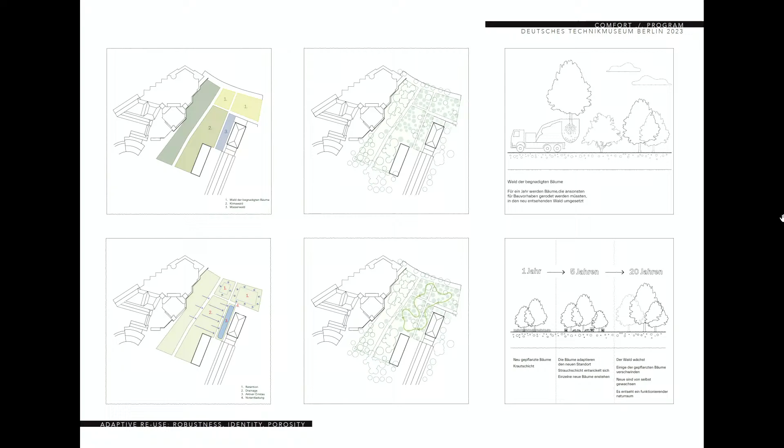I mentioned earlier the Wald der begnadigten Bäume, so that would be the forest of the pardoned trees. When you have construction sites, as you know, a lot of times trees are still cut down. Nowadays, technology makes it possible to dig them out with their roots and replant them somewhere else. So we said that of all the construction sites in Berlin, the trees can come here and have a second life.

And maybe just a general thing about design processes. Sometimes there are these projects where in the end you have the feeling that everything just falls into place, and that was the case here.

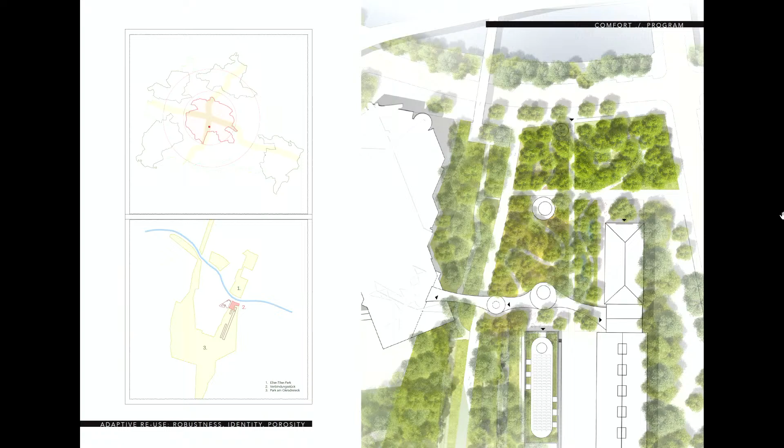Only after we made the whole scheme did we find out, by looking at these green space maps of Berlin, that we were exactly on one of the green corridors for overall Berlin, where they should make green spaces but also ensure cold air during the summer is brought into the inner city. It's kind of like the missing link in this park, the Gleisdreieck Park, one of the biggest parks in Berlin, that connects with the park that goes into the Tempodrom area in Berlin-Kreuzberg.

Yeah, and with that I'm at the end of my lecture. This is how we imagined the school kids to explore the forests in the new foyer of the Deutsches Technikmuseum. We got an honorable mention. We didn't win because the client fought for 10 years to get this building, and he wanted the building in the end. Thank you very much.

Thank you very much for your talk and insights. I think there were some solutions and questions, and maybe now you'll also be here for our crit tomorrow. We will see some of the ideas resurfacing maybe. But are there any questions now?

Thanks a lot for the presentation, it was very nice. I had one question. You had a lot of projects in existing buildings, revitalization and all of these things. Did you have any experience where the setting of the space, for example the height of the ceiling, the walls, the corridors, doesn't fit the current regulations? That would be amazing if you could share that experience, if you had such a thing.